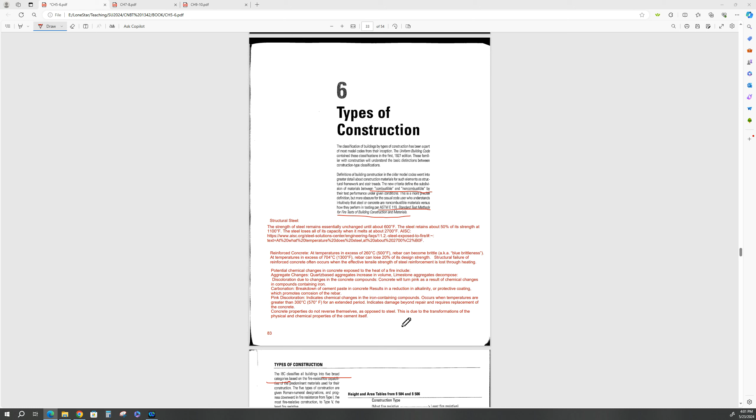Concrete properties do not reverse themselves, as opposed to steel. This is due to the transformations of the physical and chemical properties of the cement itself. So theoretically, you can heat up a structural steel frame, extinguish the fire, it goes back to ambient temperature, assuming it doesn't reach 1100 degrees Fahrenheit, and theoretically it can be deemed as still serviceable. This, of course, will be dependent upon your engineer after the analysis. And the fire's put out, of course. All right, moving right along.

The IBC classifies all buildings into 5 broad categories. Five broad categories. And here they are. Type 1, type 2, type 3, type 4, and type 5. This is from that section table. You can go read it if you want. This is the most fire resistive on this end. This is the least fire resistive on this end.

So what the designer would do is enter from the occupancy group. You enter here and slide into the tables in chapter 5 and then go up. Okay. So we've got 5 broad groups. Now, what is a non-combustible material?

Oh my, looky here. There's the definition of non-combustible materials. Okay? And they include masonry, concrete, and steel. That doesn't mean they won't get destroyed by fire. It doesn't mean that they won't be damaged by it, but they won't burn and change into a basal carbon structure like wood will. Okay? And then here's the definition of combustible materials. All right?

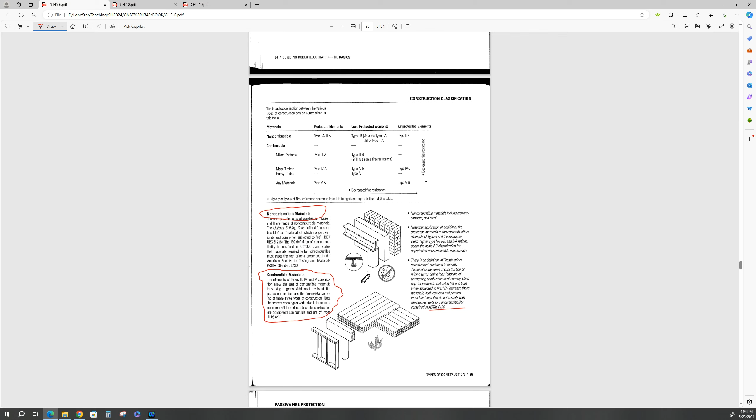Just like for fire retardant systems for structural steel. There are companies that specialize in this. And you and your building code people will be able to determine what y'all think is the absolute best. So again, non-combustible materials include masonry, concrete, and steel. Wood and plastic are obviously combustible. Now, wood burns and gives off carbon monoxide and water vapor. And if it's treated wood, depending on what it's treated with, there will be some noxious VOCs, volatile organic compounds, in the smoke.

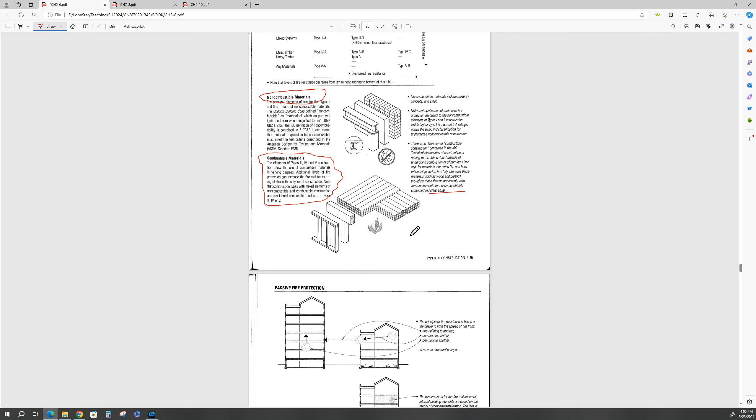Plastic, on the other hand, carpet, plastic, that's some nasty, nasty stuff. When it burns, the basal elements of most plastic is a cyanide-based chemical. So guess what's in the smoke? Cyanide. All right. Let's see here. It might be hydrogen cyanide, something like that. Yeah, but it's cyanide. And some other nasty, nasty stuff. It will kill you. All right. Let's move on down. And what's the minimum temperature at which steel begins to lose its strength? We've already gone over that.

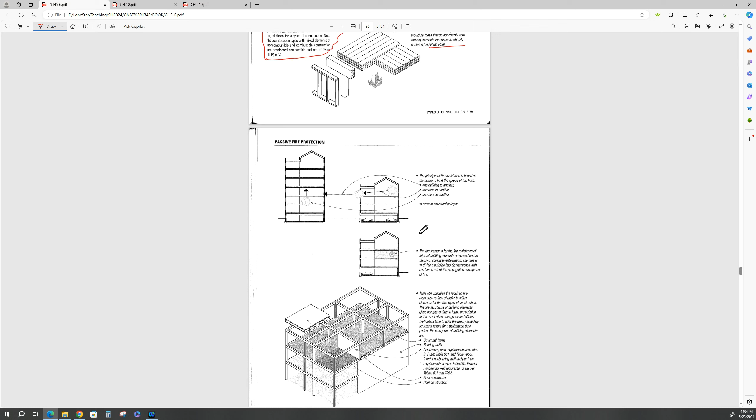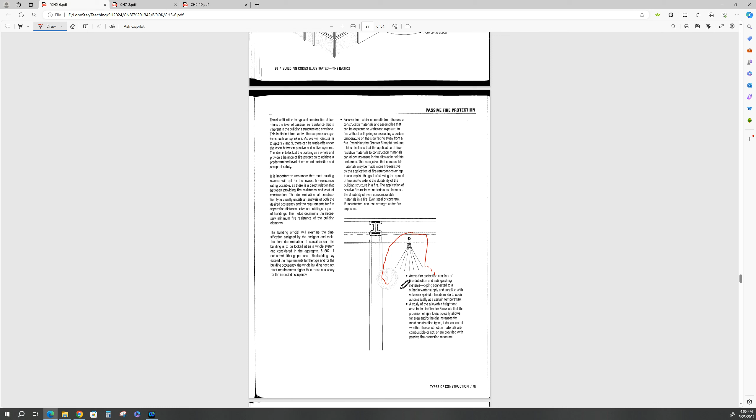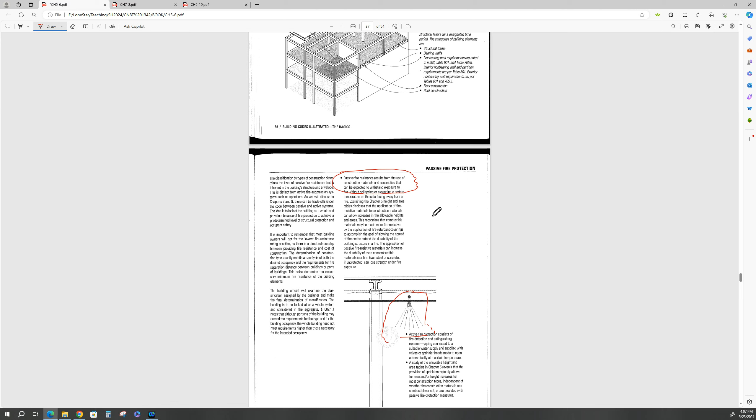Passive fire protection. What is passive fire protection? Well, passive just means that it's made out of non-combustible materials. If you spray all your structural steel or cover it, then this would be passive. And then if you have a sprinkler system, like shown in this diagram, this is going to be active. This is your active fire protection system. And your passive fire resistance, like we said, is the use of construction materials and the assemblies that can be expected to withstand exposure to fire. So there's your two passive and active fire systems.

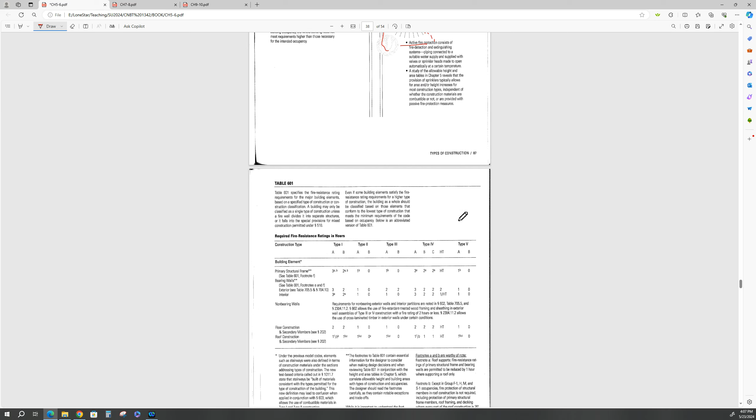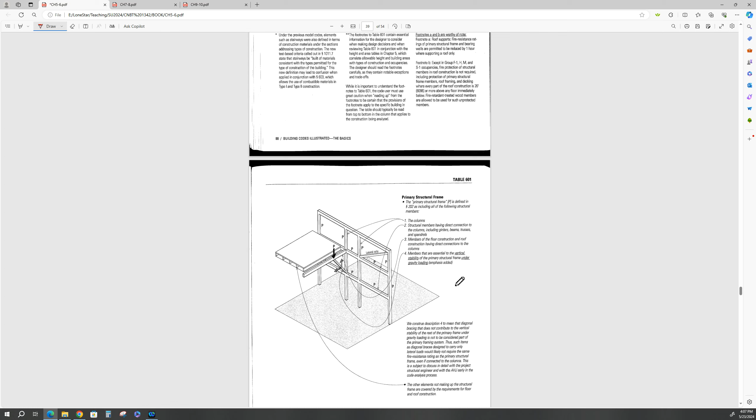Now, can a building be composed of combustible and non-combustible materials? Absolutely. Let's assume this was a structural frame. And then maybe you had a wooden floor up here. Typical wood flooring. And it's supported by a steel frame. So, can a building be composed of both non-combustible and combustible materials? Well, the obvious answer would be yes.

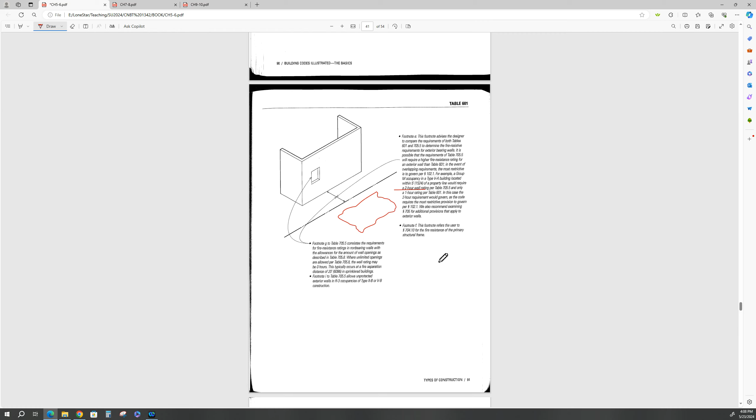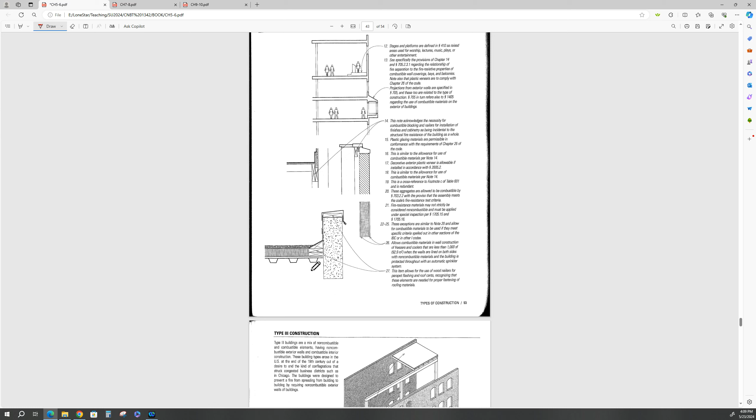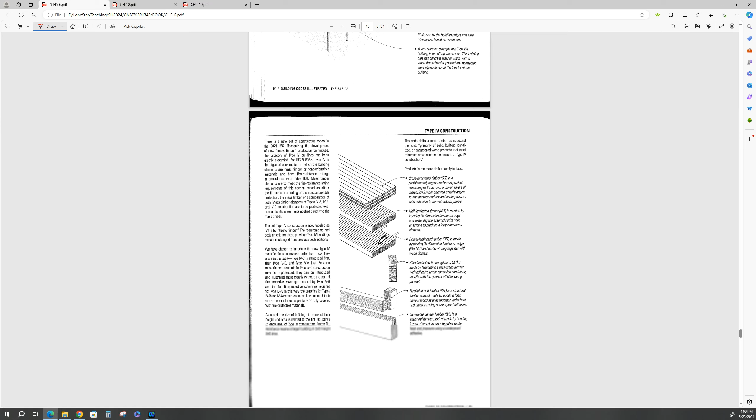Let's see if we can go down and find concealed spaces. There's type 1 and 2 construction. Talks about the difference. Now, obviously, this is wood. It's combustible, but this might be cast in place concrete wall or tilt wall. And then you've got light gauge steel up here. And that's type 3 construction. It talks about that. We went through some of this in CNBT 1311.

And more of the different types of construction. This is heavy timber down here, and flooring elements, mass timber, that sort of thing. We're not going to dive too deep into the weeds on all this. We could spend several weeks just in chapter 6. Concealed spaces. This is something you as the designer really need to be careful about. And that's why I'm stressing it in my humble expert former engineering opinion.

Concealed spaces have historically been prohibited in heavy timber buildings. Historically. They are now allowed if they meet certain conditions. And what would that be? Perhaps an active sprinkler system in the concealed space? So what is a concealed space?

Okay. Items inside concealed spaces, it's just that. They're in a concealed space. All right. Must be non-combustible except for building elements and electrical, mechanical, and fire protection or plumbing materials and equipment permitted under the mechanical code. So you could sprinkle these things. You could wrap it with fire retardant.

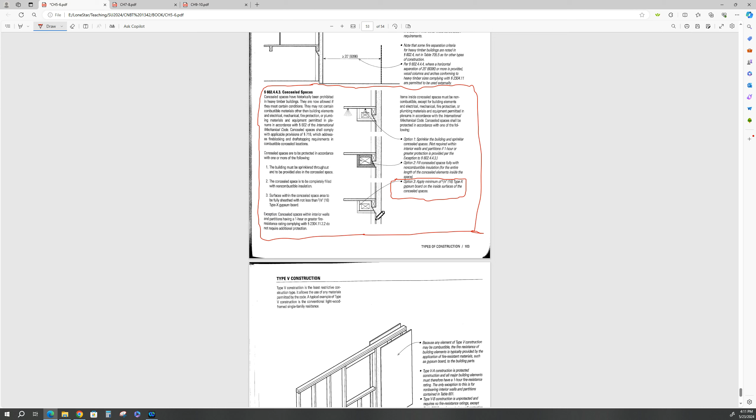All right. So this is an active system. These would be what? Passive. Because we're building them out of a non-combustible insulation and fire-resistant gypsum. Let's see. Least fire resistant. We're talking about layering this stuff. Okay, that's chapter 6. Let's go into chapter 7.

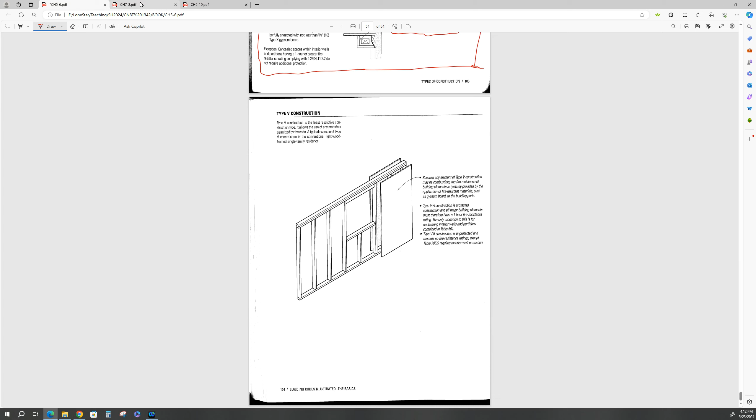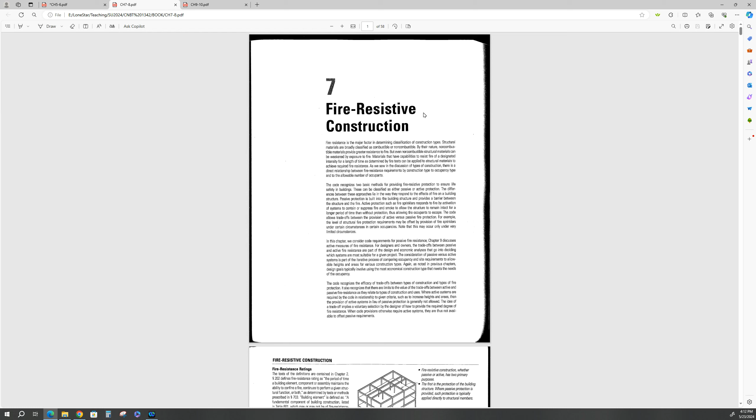Fire resistive construction. And what's the code? The code has basically two basic methods for providing fire resistive protection. We've already talked about that in chapter 6.

I guess I better do my marker gizmo. Let's get that out here.

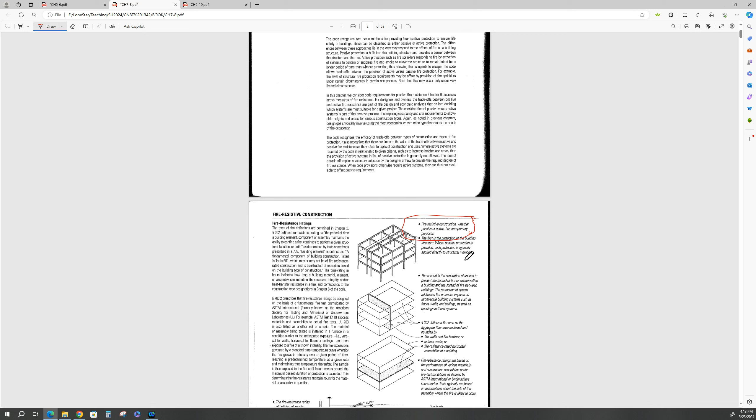Well, obviously it's passive and active. And again, what is the passive? Passive is made out of non-combustible materials or fire-resistant materials. Active would be a sprinkler system, or in some cases maybe argon gas, an inert gas, right? And this goes into the ASTM testing, the time and temperature curve and all this junk, but I'm not gonna beat you up over that.

So, we already talked about what passive protection is. We've talked about what active protection is. Now remember, active protection is both sprinklers and smoke remediation, when we talked about that in the atriums, right? Smoke ventilation is also an active system. And in something like an electrical room where you don't want water sprinkling in, you would use an inert gas and airtight doors.

And God help you if you're inside there when that stuff kicks off, because it dispels all the oxygen and you will die. So I guess it's better to die of suffocation than be burned to death. I don't know. Or die of smoke inhalation.

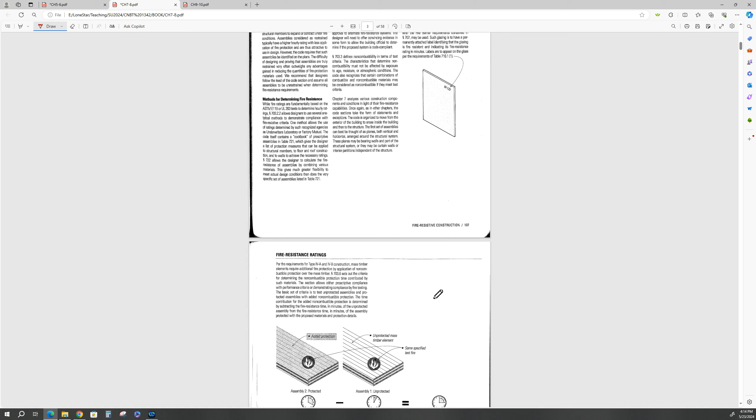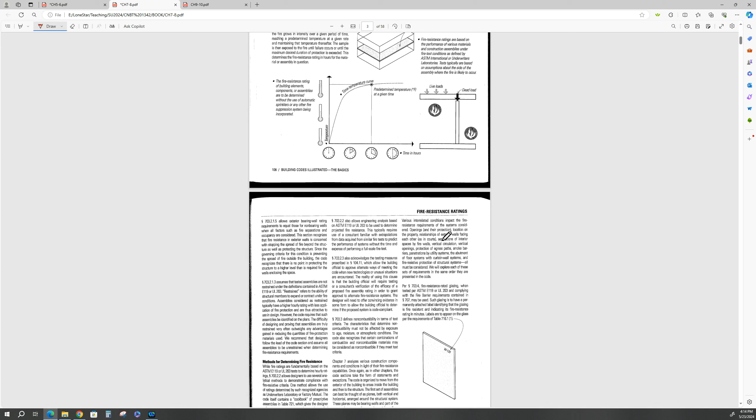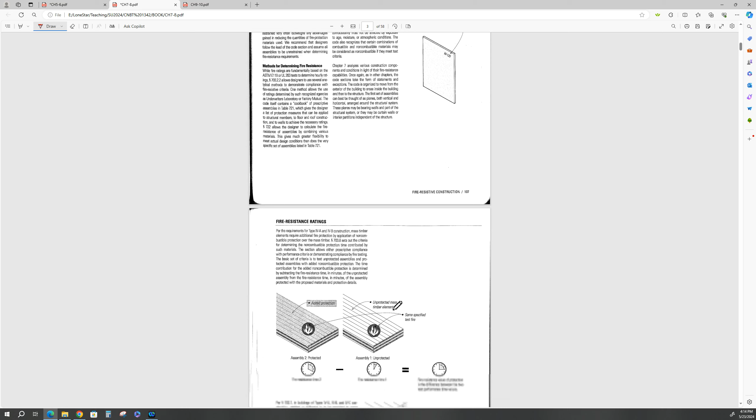Fire resistive ratings. This talks about fire resistive ratings. So you might be asked a question. Well, you will be asked a question. What is a fire resistive rating? What is it? Define it. And you'll find that answer in here.

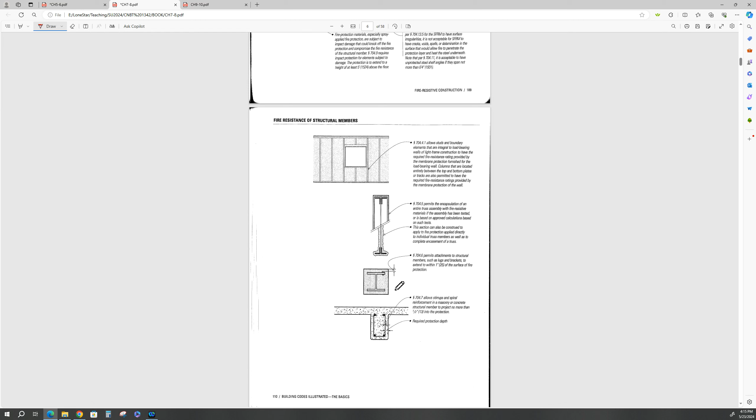All right. Fire resistance of structural members. What is a projection? This talks about fire resistance of structural members. We talked about spraying them, wrapping them, boxing them in with sheetrock, extra cover for your reinforcing steel for your concrete.

Projections. What is a projection? This defines a projection. It projects out of the building. The projection distances are based on fire separation distances from a table in the code.

It's a piece of the wall that projects out from the wall, and the fire separation distance is D, from the exterior wall to a line to determine fire separation from another structure, and that's what this is. That's your line. And no projections are allowed when D is less than 2 feet.

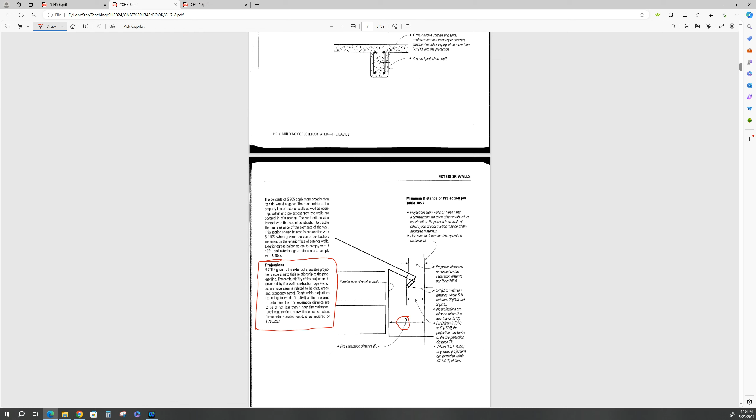Okay, all right. So this is your projection distance. So if you're butting up against another structure, you may have to back this off a bit. They're going to check this in your design plan. This is where you'll find your projections, and this gives you what some projections are.

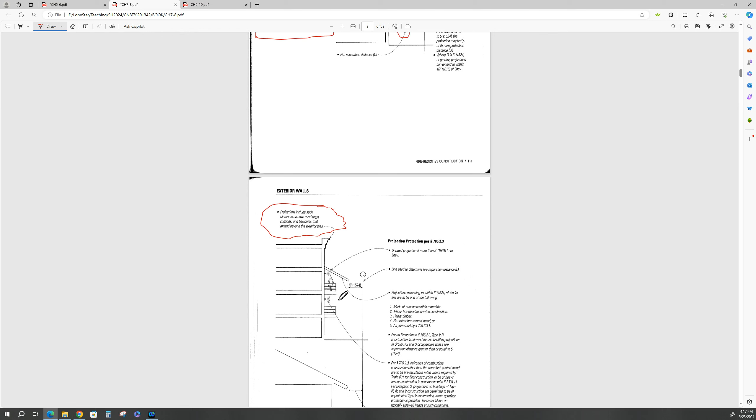So they're eaves, they're overhangs, they're cornices, they're balconies that extend beyond the exterior wall. Hidden away in here is cornices, eaves, and balconies. Okay, all right. That's a projection.

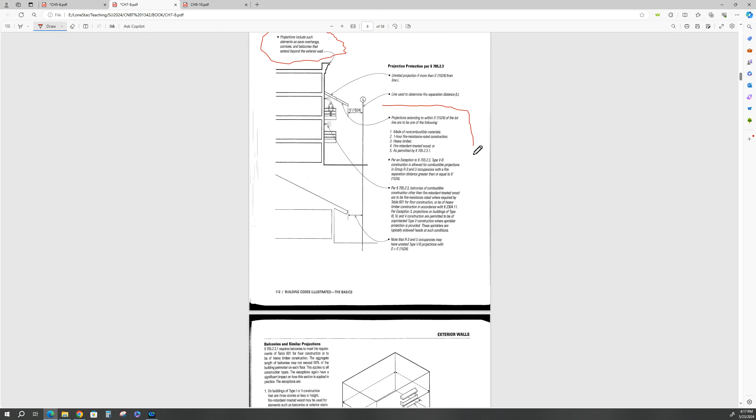Now, projections extending within 5 feet of the lot line. You saw the lot line before. Projections extending to within 5 feet of the lot line are to be one of the following materials: non-combustible materials, 1-hour fire construction, heavy timber, fire retardant treated wood, or as permitted by the IBC code number right here.

Okay, so there are 5 of these, and they've got to be one of the 5. So if you're asked to list all 5, then you can do that. You know where it's at. All right. Multiple buildings on a site. You go through that.

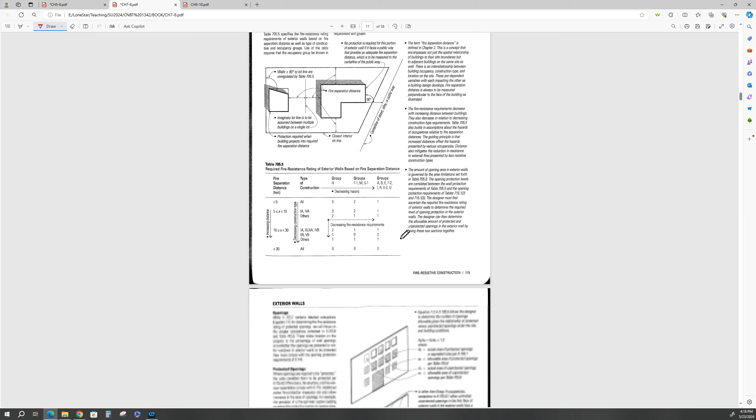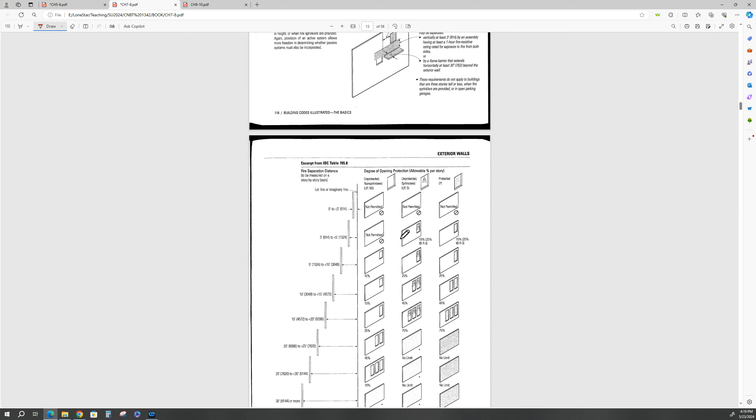This table allows exterior walls to have a certain amount of openings, vertical exposure, parapets, for fire jumping over the parapets. And we talked about there's no openings here, okay.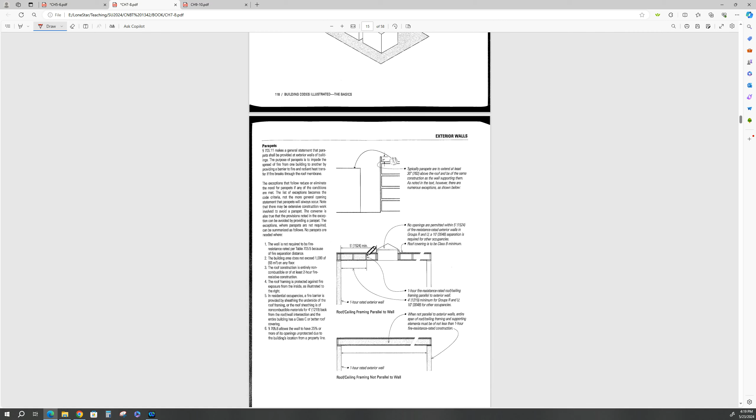Structural stability. This is something you need, you and your structural engineer and your authority having jurisdiction. Well, what is the structural stability? Structural stability is simply in regards to firewalls, that they're so designed that it stays in place for the duration of the fire rating while the structure collapses on either side of it. Okay? So let's say this is your firewall.

So you got a structure over here, and the fire's over here, and they're suppressing it, and there's no fire over here, but you got this firewall. So this wall stays intact for the duration of the burn, or while they're trying to suppress it, and allows this side to collapse due to the fire, depending on what it's made out of, or sag if it's steel. It'll still collapse while the firewall stays in place. That's your structural stability.

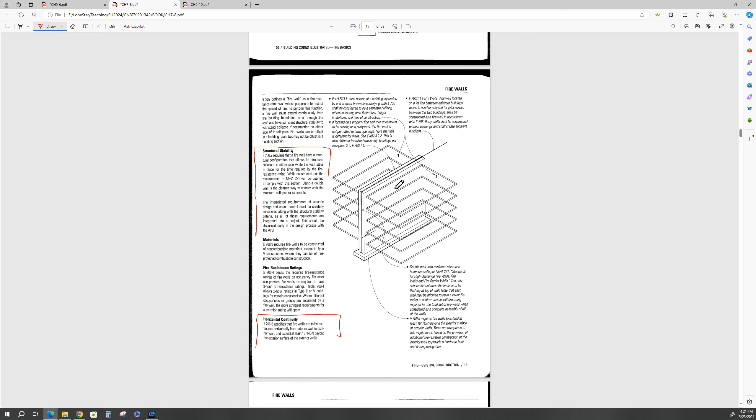Horizontal continuity. Specifies that firewalls are to be continuous horizontally from exterior wall to exterior wall and extend at least 18 inches beyond the exterior surface of the exterior wall. So you've seen this in apartment complexes on balconies, where in between each unit is a firewall, and that firewall extends out at least 18 inches. Some of them go all the way to the end of the balcony to seal off the balcony. But that keeps the fire from jumping from one unit to the next unit. Let's say there were 2 units in here, and we got another firewall.

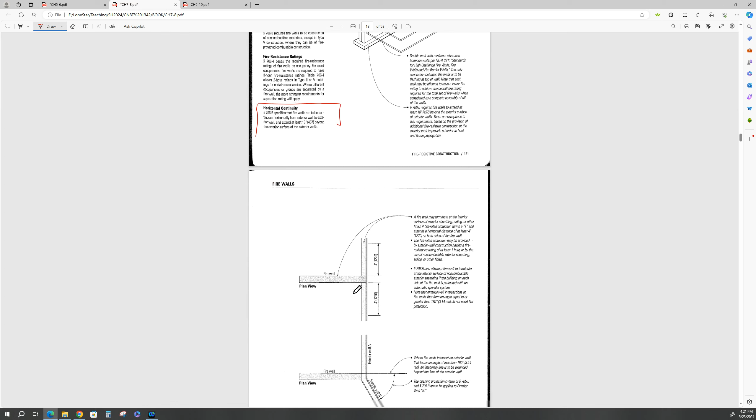This talks about firewalls in plan view. And it could terminate at the interior surface. It could. But horizontal continuity of the firewall. So in plan, let's say we have one unit here, and we have another unit over here, and in between each unit is a firewall. And let's say this is a high-rise condo or something, and this is your balcony. Some designers will extend the firewall all the way to the balcony. And it also serves as security.

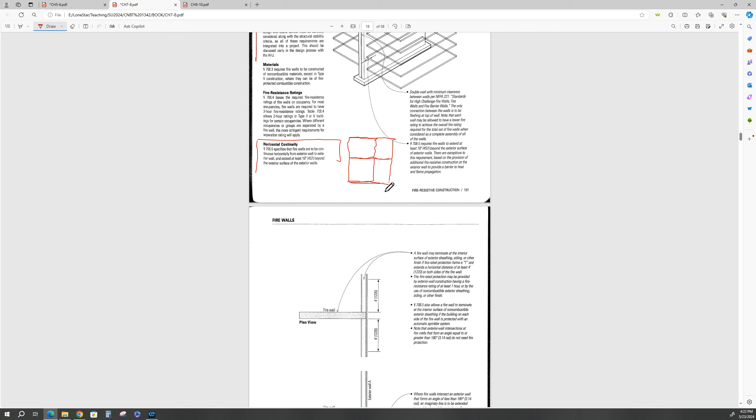So one drunk goober just can't jump over the railing and come visit you when you don't want them to visit.

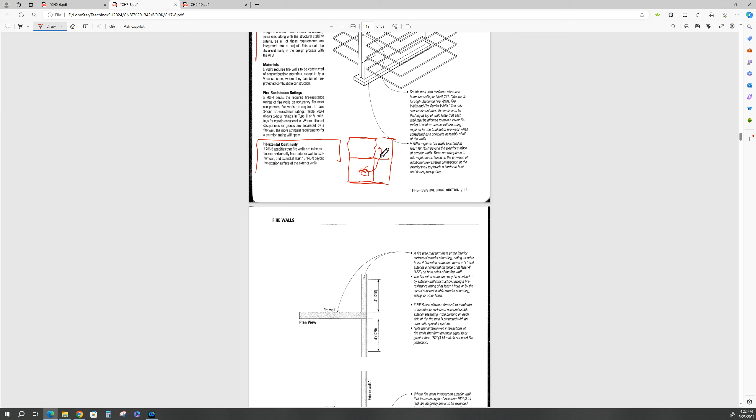But more importantly, it keeps a fire in this unit contained and helps it not jump into the next unit. And that's what they're talking about. Okay? And this is a good example of continuity. This is the firewall. This is the firewall. And you see, if this was like the main living area of the condo and this is an outside balcony,

Missy can come over here and enjoy her mint julep while the next apartment is burning, which she wouldn't do. They'd evacuate the bloody building.

But that's what it's all about. It just helps contain the fire, so the suppression team can come in here and deal with this whole unit. The other unit is probably going to have smoke damage, but that's it. All right.

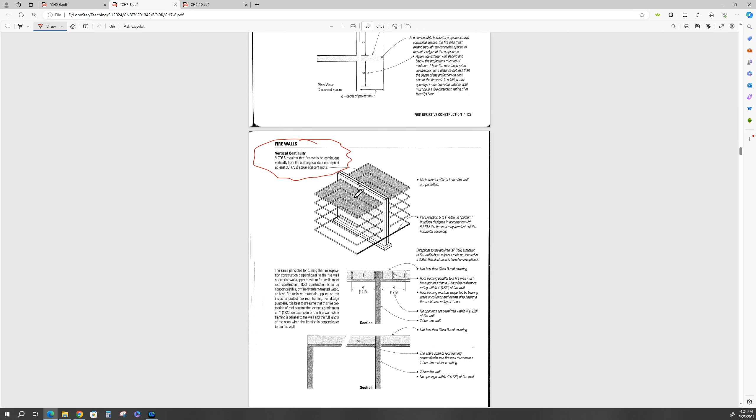Now, we want to talk about vertical continuity. Just like horizontal continuity, it's the same thing. Firewalls extend up from the building foundation to a point at least 30 inches above the adjacent roofs. So if this unit's on fire, it's something to protect against the fire jump. All right.

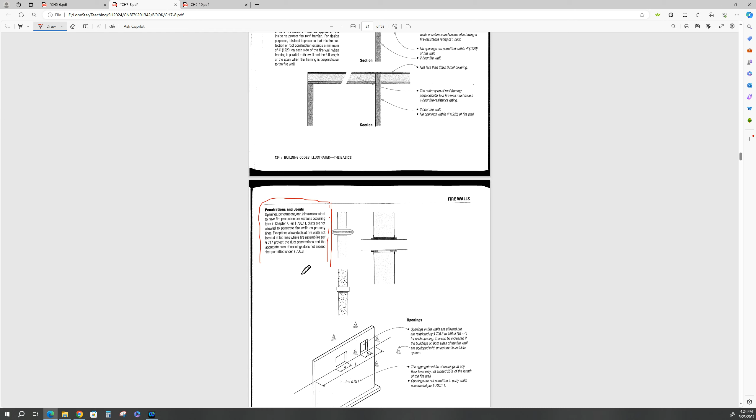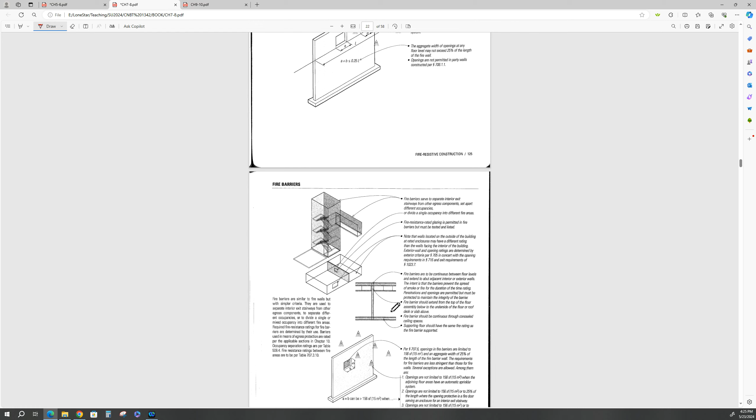Okay, the two types of penetrations are through and membrane. Through penetrations and membrane penetrations. Then you got fire barriers, and there are companies that specialize in fire door dampers, automatic links that fray, and stuff like that. So the two types of penetrations are through penetrations and membrane penetrations.

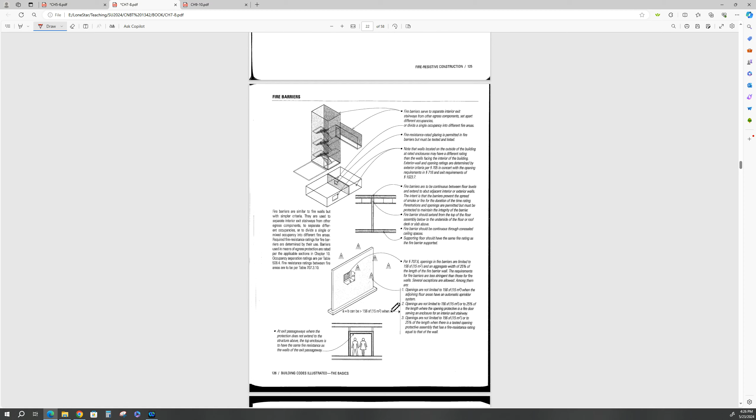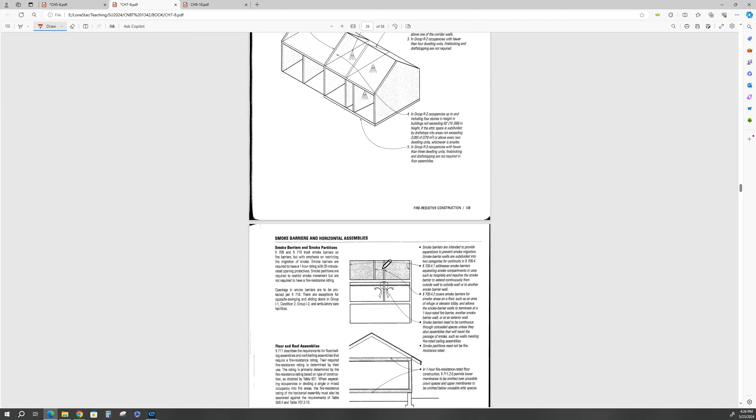Okay, let's go down through this. All right. And this talks about occupancies and what you can do. Smoke barriers and smoke partitions, floor and roof assemblies. Okay.

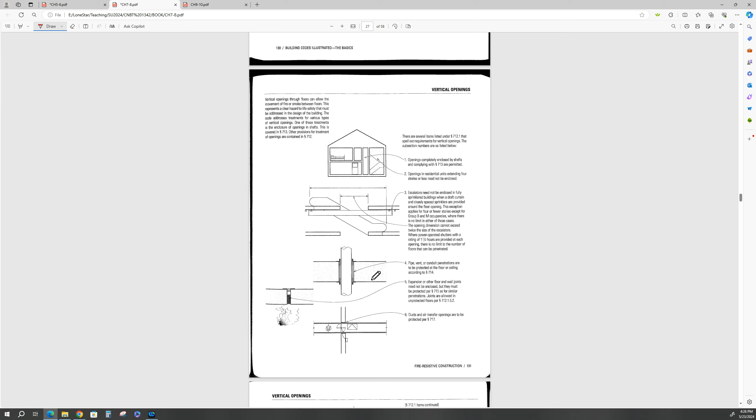And this is more vertical openings. Expansion joints of other floor walls need not be enclosed, but they must be protected. Ducts and air dampers, pipe and vent and conduit. There's all kinds of things you got to take into account. All right.

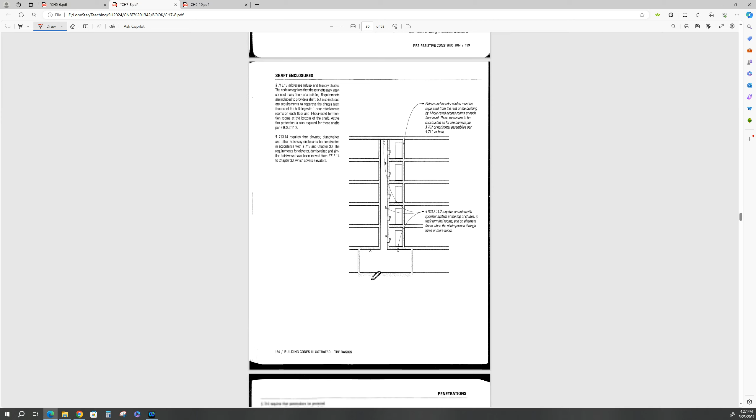There are two types of penetrations: through penetrations and membranes. And we could spend a lot of time on this. Shaft enclosures. Okay. All right. Other membrane penetrations that go through only a portion. Penetrations are two basic types. I already told you this. One is a through penetration that by definition passes through an entire assembly, and the other penetration only goes part way through the wall partition.

Okay, so this is an example of a membrane, and this is an example of a through. This is one of the things I don't like about Ching, is he likes to break this stuff up. This talks about how you detail these penetrations.

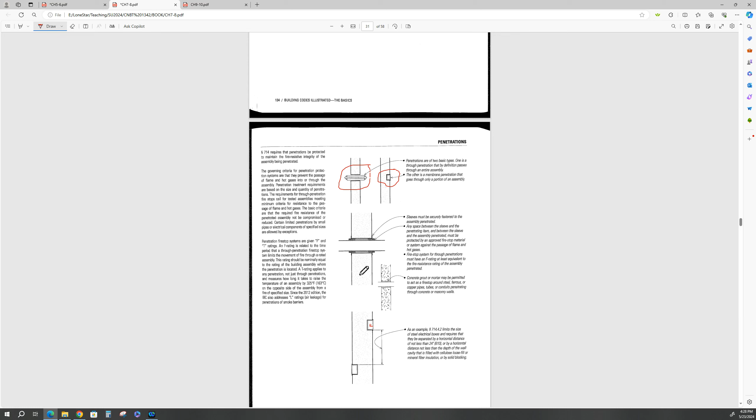All right, here's another example of two membrane penetrations. So what might this be? This might be an electrical box, right? And then here would be your conduit, home run conduit, running down the wall. Okay, this would be a pipe coming through. There are people that specialize in selling these things that are fire rated with the right type of fire rating. All right. Okay. So every penetration, plumbing, you name it. The devil is in the details. All right.

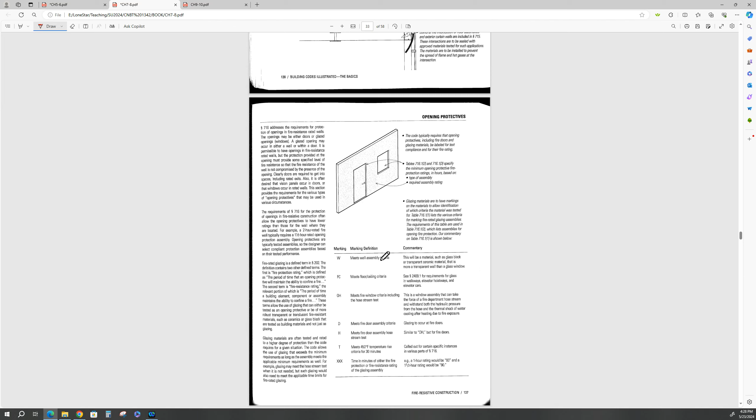This whole thing goes to the different kinds of openings. Okay. Marking the openings. What does it mean? You may have to do this as a designer. Protective openings. How you label them. Your push bars. Where are they at? It's got to be ADA, right? We go back into that in egress and access. Yeah. Okay.

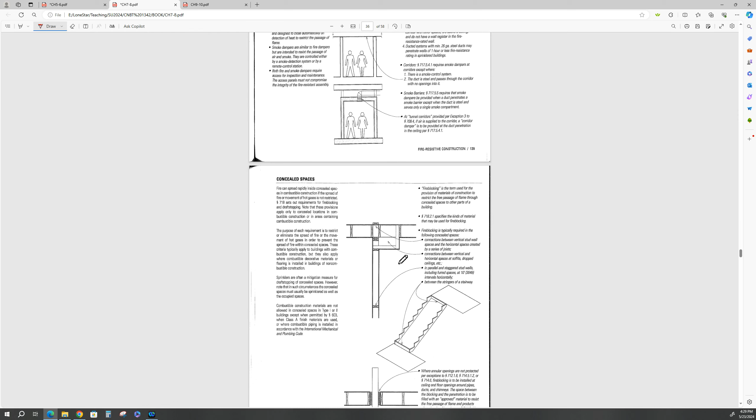All right. More concealed spaces. We get back into concealed spaces again. See, he bounces around a lot. I don't particularly like that.

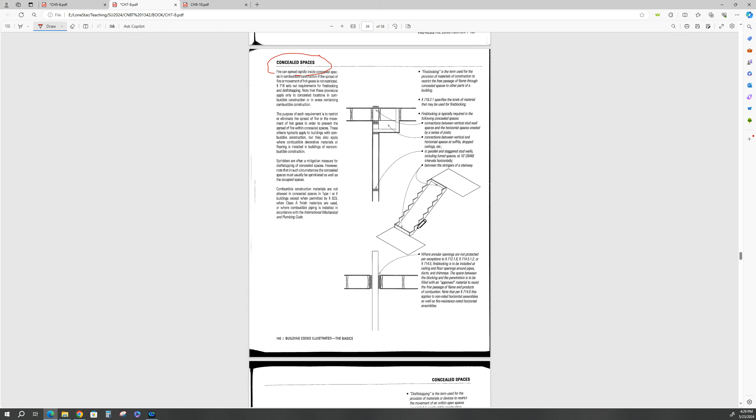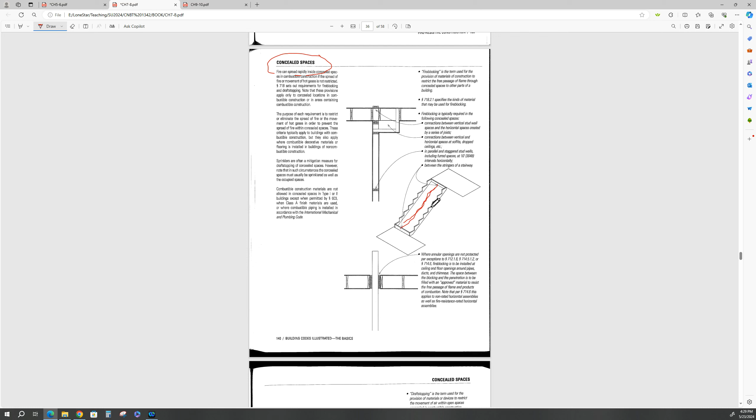All right. Stairway stringers, where you've got two stringers, and if this was my wooden stair system and you designed a wooden stairs with just two stringers, I'd fire you. I told you all that in CNBT 1311. You always use a middle stringer. It keeps the drumming effect out of your stairs. Okay? Anyway, I digress.

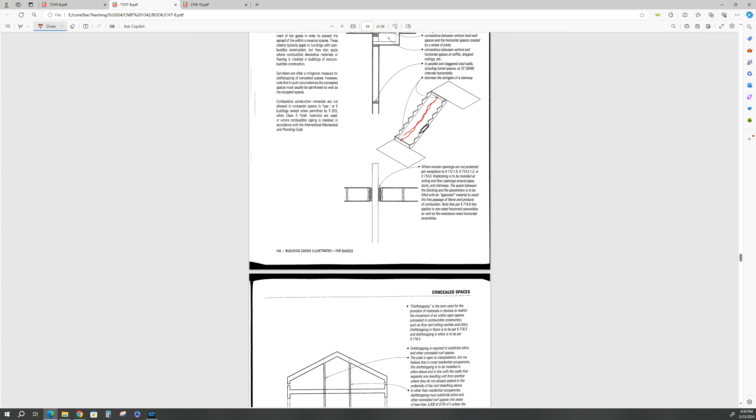You got to worry about this. What happens? Because you've got a fire down here or fire up there. If you got a fire down here, the heat's gonna run up and the gas is gonna plume. So you might have to put fire blocking in here, or use a combination of non-combustible materials to enclose this enclosed space. All right. And you got thermal and sound insulating materials. All right, there's all kinds of insulating materials. Here we go again. We've already talked about this, right?

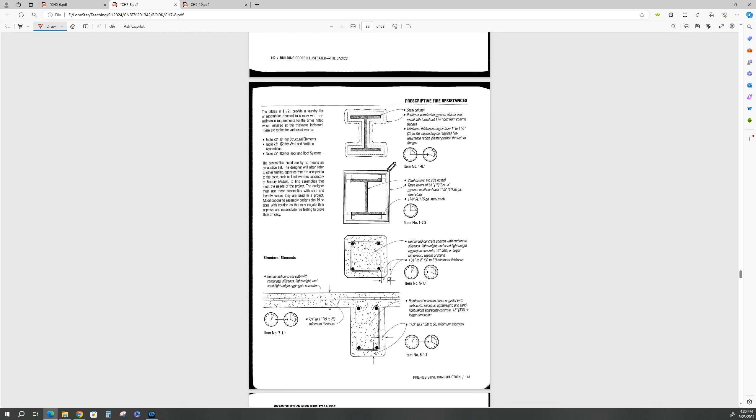Alternative methods of fireproofing. And this gives you an idea in this section of how much time you've gained by doing these certain things, these different types of details. All right. Wall partitions.

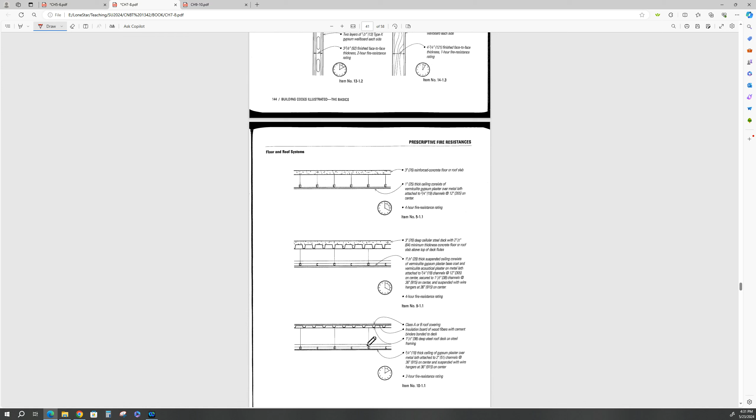Again, the detailing. So what do you think is going to happen? You got a fire down here and you don't have an active sprinkler system. Well, this tie wire up here is going to elongate, right? And your suspended ceiling may come down. So that's why even all these office buildings have sprinkler heads all down in here. All right. But with the general construction details, these are rules of thumb. This gives you a 4 hour fire resistance rating. That gives you 4 hour. Okay, your mileage is going to vary.

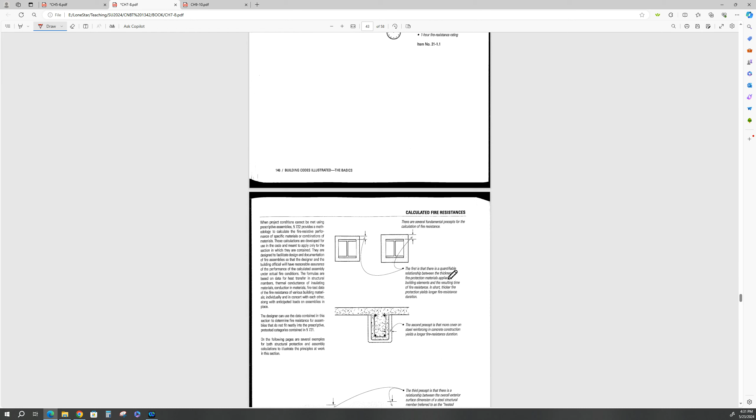Calculated fire resistances. There's formulas you can go through. You start building stuff up. More concrete you put over it, more covering. Maybe you come in here and you spray foam on there, the details for your expansion joints. That has a fire rating. All right.

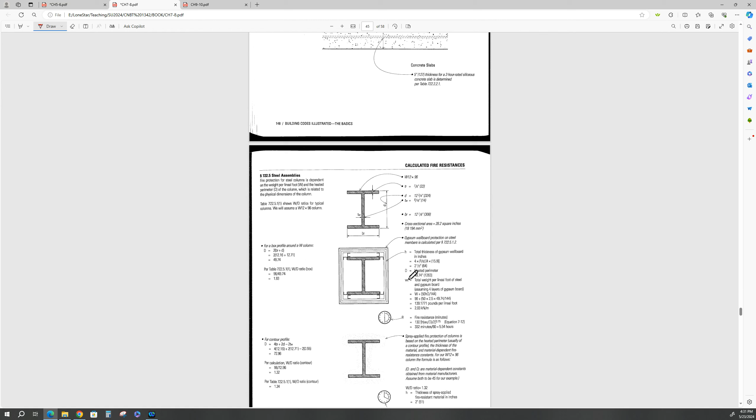And no, you're not going to be asked. You've already seen the exam, so I'm not going to make you go through these calculations. If I was a mean old man, I would, but I'm not going to. Okay? All right.

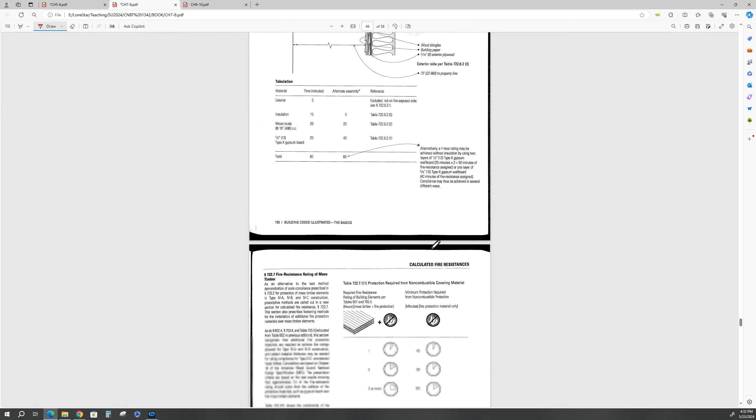Wood assemblies. Cedar shake is a bad idea. Wood shakes are a bad idea. You use Hardie siding. Stuff doesn't burn. It's made out of cement. I mean, come on. All right. Hint, hint.

Hint, hint. 1/2 inch type X gypsum board gives you 25 minutes of running out of the building time. 5/8 inch type X gypsum board gives you approximately 40 minutes. Okay. 1/2 inch is 4/8, right? So an extra 1/8 of an inch gains you 15 minutes.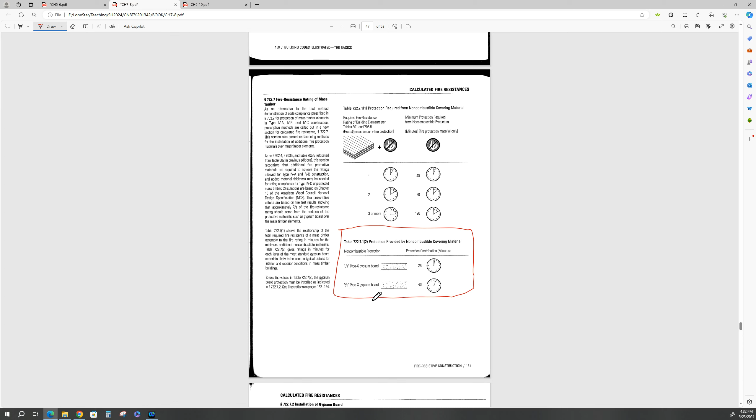So if you put like 3 or 4 of these 5/8, then you're stacking all this up, and you can go back through your calculations up here and figure out what your fire rating is going to be. You get with your fire marshal in your local area and your building inspector in the pre-design meeting, and guess what? You can come up with a plan.

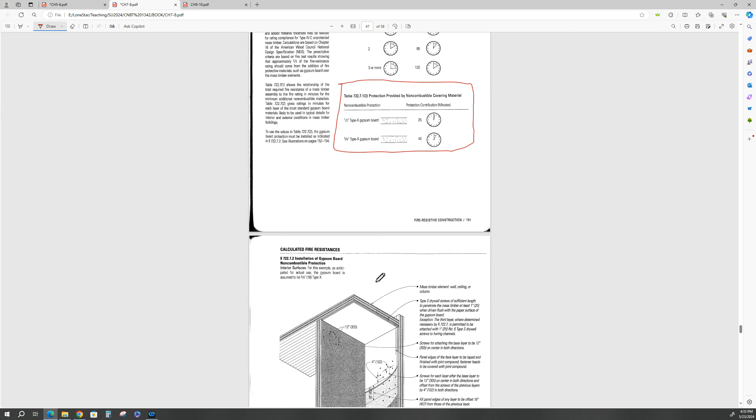All right, let's move on to Chapter 8. Interior finishes. Okay. All right, wall and ceiling finishes are classified by what? Well, you will find that the primary consideration of this chapter is the flame spread and smoke generation characteristics of materials when they're applied to underlying surfaces. All right.

So, your wall and ceiling finishes are classified by their flame spread and their smoke generation. Okay. There you go. That's how they're classified. And every material has their own flame spread rating and smoke generation rating. And no, we're not going to go through every single bloody material, okay?

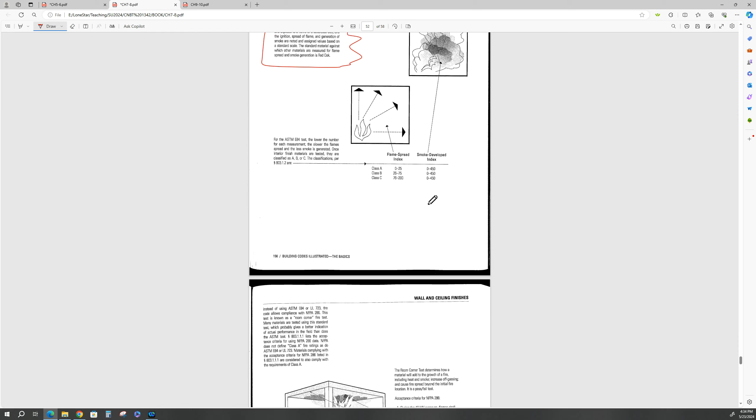But you can see here class A, B, and C, and here's your flame spread index and your smoke developed index. And that all ties back to a code and UL. There's the Underwriters Laboratory again. UL sets a standard, and they still do. All right.

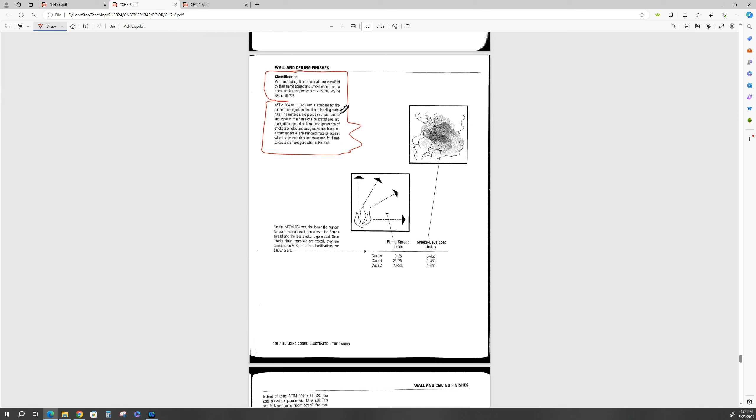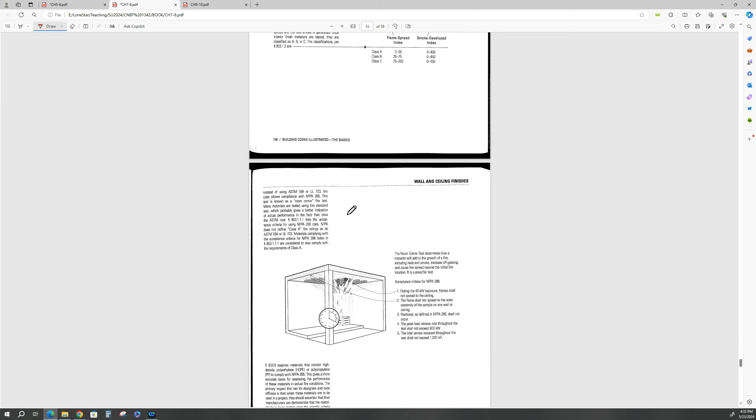And ASTM's got a standard for everything. Latex gloves, condoms, tires, you name it. There is an ASTM testing standard for everything manufactured. Okay. All right. There's a flame spread box. Okay. All right.

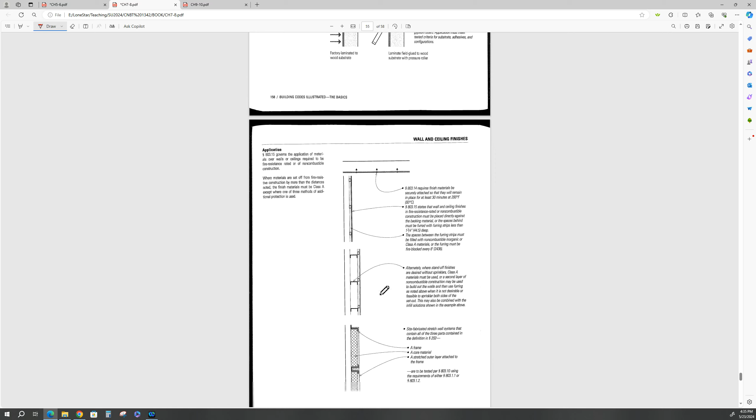The required classes of finished materials are defined by what? What are they defined by? It's another question. All right. How are they defined? Well, are we talking about occupancies, right? So we're going to go back to occupancies. All right. They are defined by the occupancy. Okay.

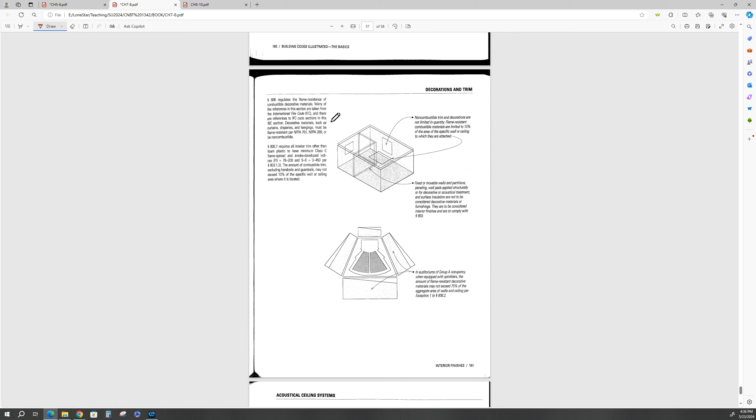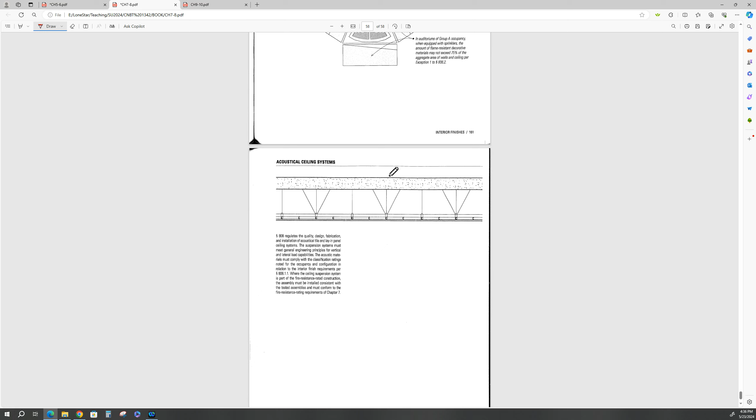Non-combustible trim, fixed or movable, in auditoriums of Group A occupancy, okay, taken from the International Fire Code, the IFC. All right. Here it goes back to suspension systems again, depending on your fire rating. All right. So, the required classes of finished materials are determined by your occupancy.

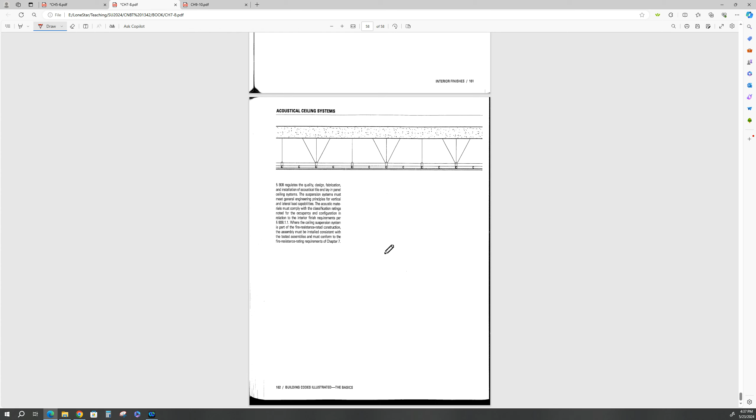The requirements are further subdivided in 2 occupancies, sprinklered and unsprinklered. Is it an unsprinklered occupancy? Is it a sprinklered occupancy? And the final consideration of finished materials occurs in what two areas? Well, it's going to occur in the exits, exit access areas or rooms, which makes sense, okay?

The final consideration of what materials you use is going to be determined by where it is. And the two critical areas are your exit areas, your access areas or rooms. Access to an exit. Access to a room that's not on fire, okay? Wall and ceiling finishes. The required classes of finishes and materials are determined by occupancy, okay? And the requirements are further subdivided into sprinklered and unsprinklered, okay?

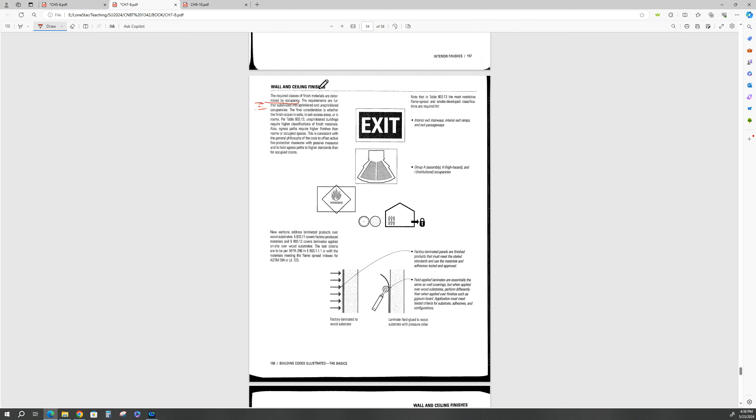The final consideration, so there's actually three things in here, right? Three things of importance. Three questions, all right? Is whether the finish occurs in exits, in exit access areas, or in rooms per this table, all right? There we go. Okay? So again, three things of importance here. Wall and ceiling finishes by the exit sign on page 158 of your book.

All right. Is the occupancy sprinklered or is it unsprinklered? Which makes sense, doesn't it? Okay. And if it's sprinklered, it buys you more time. If it's unsprinklered, well, you got a problem. And the final consideration, again, is where this is at.

Is it an exit? You don't want your fire exits, your exits out of the building, your emergency exits, to be all combustible materials, right? You go down to the Toyota Center, you go down those stairs, all that stuff is concrete. All the way out the door, the exit door.

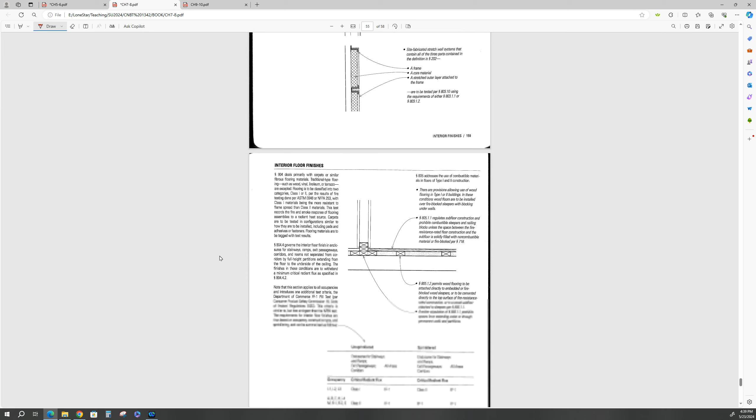Okay. All right, so we're going to move on to chapter 9. That's pretty easy. There are only 4 questions out of chapter 8. Could have been a lot more, but we're at 42 minutes. I'm going to go ahead and kill this video here, and then we'll pick up chapters 9 and 10 in the next video.

Okay? All right. Thank you for your patience. Follow along with the videos in the book with your exam, and it will speed things up because we don't have a lot of time in this 6-week session. All right.